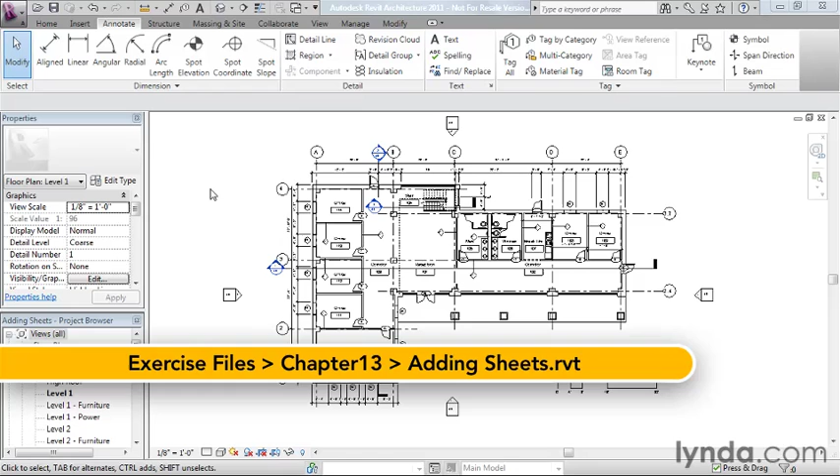Now, if you recall, back at the beginning of this training series, we started this project with the commercial default Revit template. The commercial default Revit template actually included several pre-made sheets. So if I scroll down here on the project browser and look at the sheets branch of the tree, you'll see that there's already an A1 floor plans, an A2 reflected ceiling plans, there's a roof plan, elevations, and so on. So many sheets are already provided in here.

And if I go ahead and open up one of these, like the A1 floor plans, you can see that there's already viewports on some of these sheets, and what we've been doing all along throughout the training series has already been kind of on the sheet and ready to go.

So what's nice about starting with a template like that - we kind of bring everything full circle from the beginning of the training series - is when you get to the point when you're ready to actually output, you don't have to spend a ton of time building an entire document set. You already kind of have most of the work done for you.

Now, I'm saying most because it's unlikely that it will be perfect. It's pretty typical that you'll have to go in and make some modifications. But again, it's pretty nice to have this much to get started with.

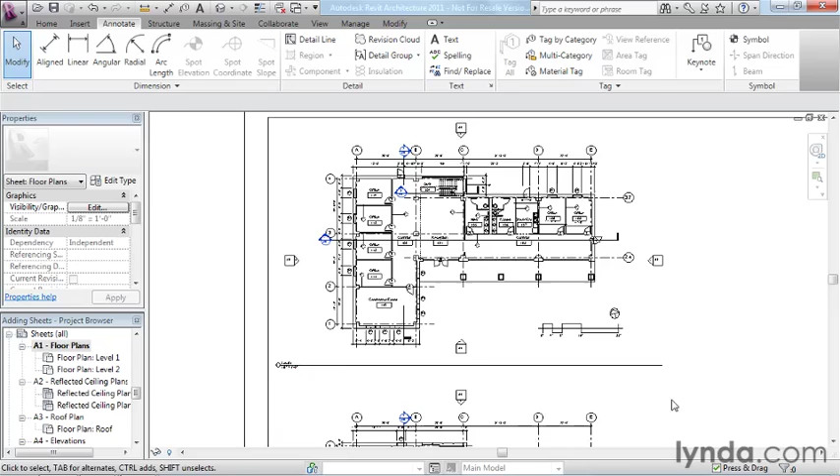So you can see we've got our first floor and our second floor on here. We've got a sheet with reflected ceiling plans. We've got a sheet with a roof plan, and so on.

Now, perhaps there might be a sheet or two that's missing that you haven't planned for. For example, earlier in the training series, we added a furniture plan, we added a power plan, and these might not have sheets readily available. We added some building sections, whatever it might be. So let's go ahead and add in some sheets for some of these missing items.

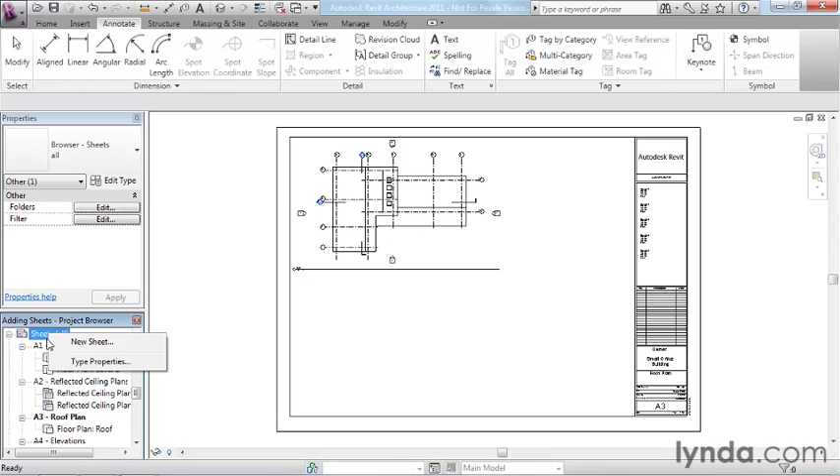So to add a single sheet, it's a pretty easy affair. We can just right-click on the Sheets branch of the project browser, click the New Sheet item, and we'll get the New Sheet dialog that comes up. Now, this particular project has two title blocks already loaded, a B size and an E size.

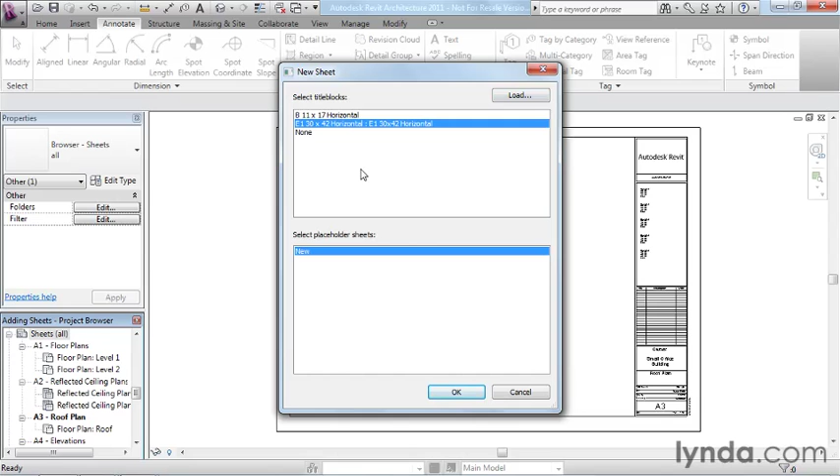If you don't see the title block that you want, or if you want to use your office standard title block, you could click Load and go out and browse and load the family like you can any other family. I'm just going to go ahead and choose the E1 sheet that came from Autodesk, like the ones we have in the rest of the document set here, and click OK. And that just gives me a blank sheet of paper.

Now, like anything else that gets numbered in Revit, let's go ahead and zoom in on the title block here. Revit will go ahead and just use the last number available based on the list of sheets we already have. So this one is going to be A14.

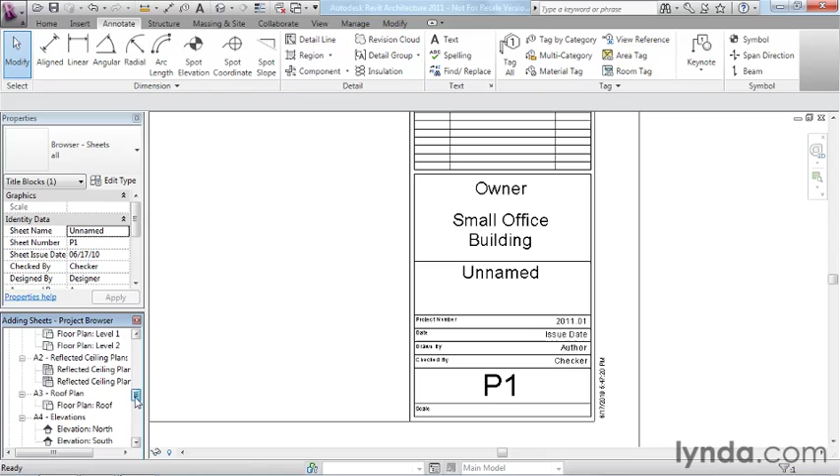And if I wanted this to be maybe E1, because it's electrical, or power plan, or let's do P1, because it's a power plan, I could just simply type P1 there. And that will update not only here on the sheet, but if I scroll down and look at my list, you'll see that it updates there in the project browser as well. So instead of unnamed, let's do the same thing.

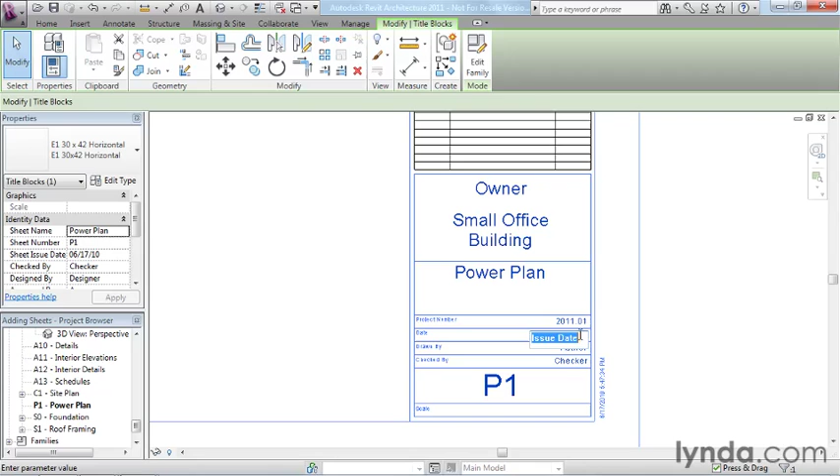And we'll make this power plan. Now, other information gets filled in here, like the project number, the issue date, and so forth. So we could put in a date here. I'll put in something for the summer of 2010. I'm the author, so I'll put my initials, and whatever other information we need to fill in there.

Now, scale is not something we need to fill in. As soon as we drag in the view that we want to place on this sheet, the scale will automatically fill itself in. So let me zoom back out.

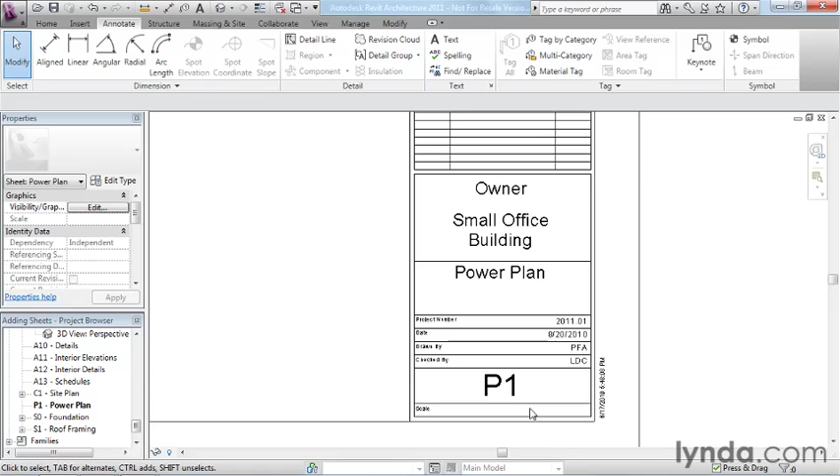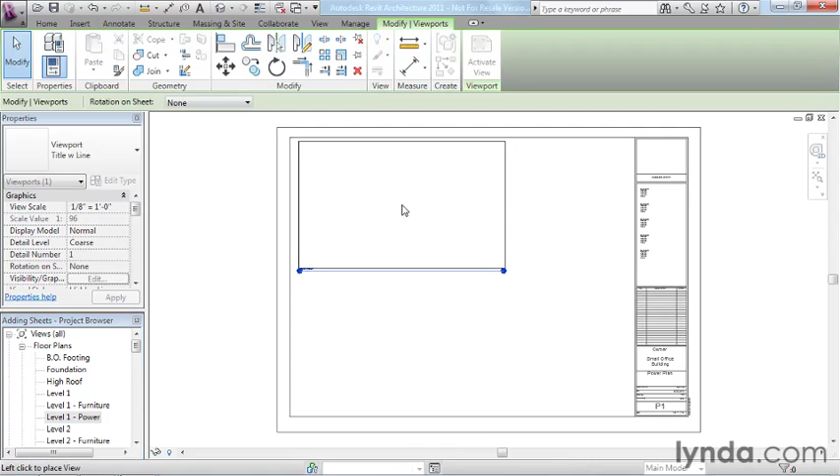Let's go ahead and add our plan to the sheet. I'm going to scroll back up and locate my level 1 power plan. All you have to do is grab that level 1 power plan from the project browser and drag it, then drop anywhere on the sheet, and you'll get a rectangle attached to your cursor, then click where you want it to go.

And just like that, you'll have your power plan appearing on the sheet. If I do a zoom in region, we can take a better look, and you can see it looks exactly the way we left it, with the halftone furniture and the power symbol showing and so on.

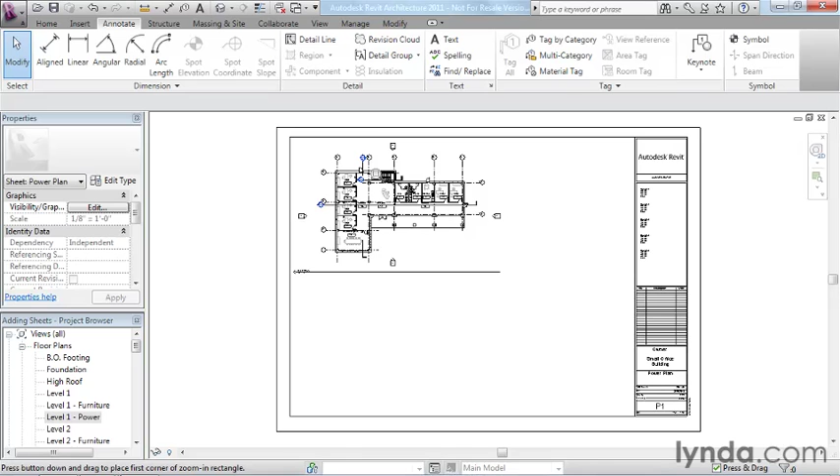While we're here on the sheet, let me point out another thing. I'm going to zoom in region around these callouts. You'll notice with the section callouts, we've got section 1, section 2, and section 3, and they're all calling out sheet A6. If I come down on the project browser, scroll down and locate sheet A6, you can see there's your 1, 2, and 3 sections all on this sheet.

So all of your references kind of take care of themselves, and Revit handles all the cross-coordination between those different sheets for you. Now, one other thing that might be nice to have, since we have a fairly large collection of sheets, is to go ahead and do a sheet index of the sheets we have, and we can place that on one of our sheets as sort of an index or table of contents.

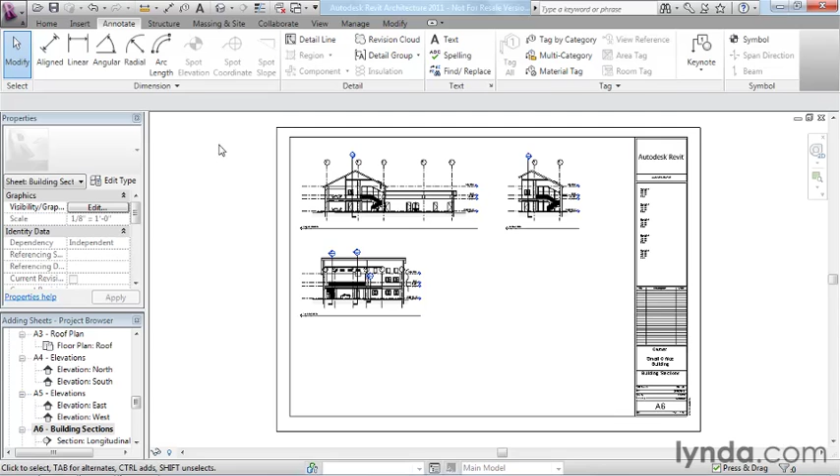I'm going to go to the View tab, and beneath Schedules we have two kinds of lists we can create. A view list is a list of all the views on the project browser. A sheet list is an actual list of the actual sheets, the drawings we're going to print from. So this is the one we want—this is the sheet index we're going to create here.

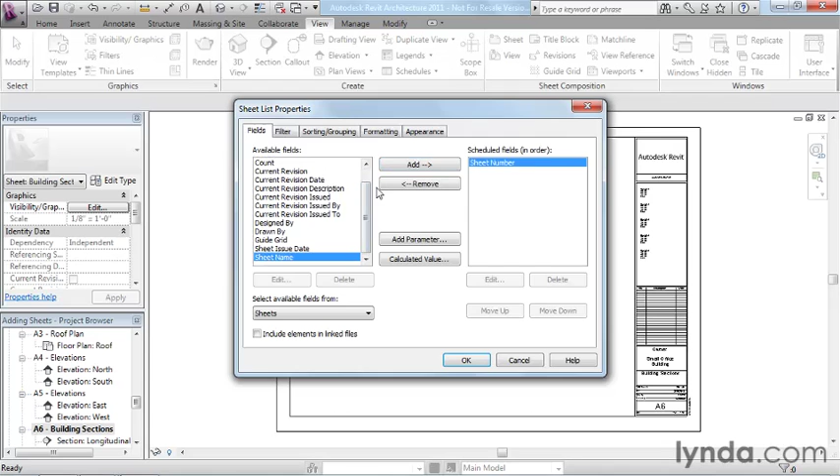Now, it looks a lot like a schedule because in fact it is—it's just a schedule of sheets. So we're going to keep this one fairly simple, and I'm just going to do sheet number and sheet name, and I'm going to click OK, and expand this out a little bit.

You can see all the different sheets listed, and there they all are. Now it looks like they're all sorting correctly, when in fact that's just the order they were created in. It's a little tricky to get them to sort exactly correctly without getting into custom parameters. In other words, I can sort alphabetically in Revit, so I can get all the A's grouped together, but then it'll do C next, then S and P. Technically speaking, a C really ought to come before the A's—the civil plans always come before the architectural.

To get that kind of sorting to happen, we'd need to get into custom parameters, so I just want to mention that to you. There's a pretty good chance that most of your firms, your CAD manager or other support person, has taken care of this for your project template.

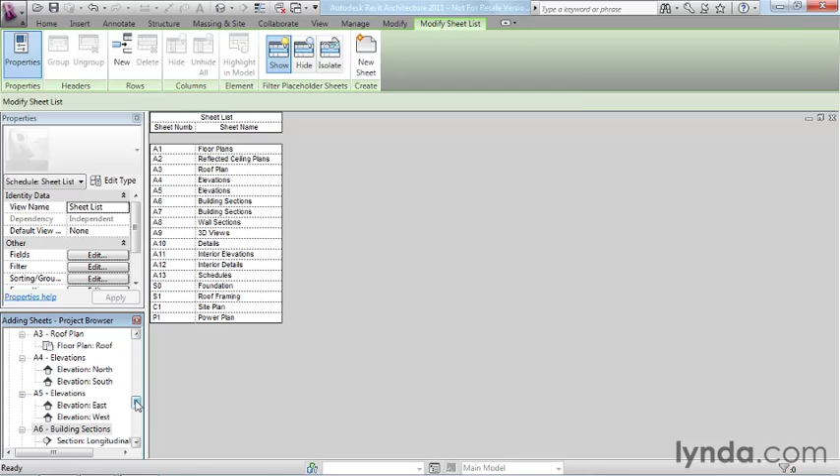So let's go ahead and take this sheet list as is, and we'll drag it onto one of our sheets. I'm going to just put it on the first floor plan right now. So we'll go back to that plan, zoom to fit, and then locate our sheet list, which will be under Schedules and Quantities—here it is right here.

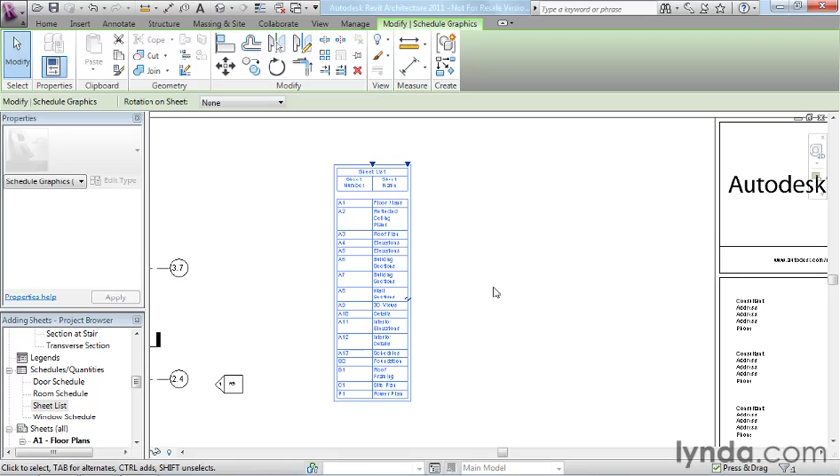And we'll drag it in here. Now, this is the first time we put a schedule on a sheet. This still kind of intrigues me how Revit handles it—you notice how I resized the columns when we were looking at the view, but when you drag it to the sheet, they always squish up really mini like this. Well, we have these little grips right here, and we can drag it out to give it a little more room. So there we go—we have our sheet index on our new sheet.

In the next movie, we'll actually create a list of sheets from placeholders.